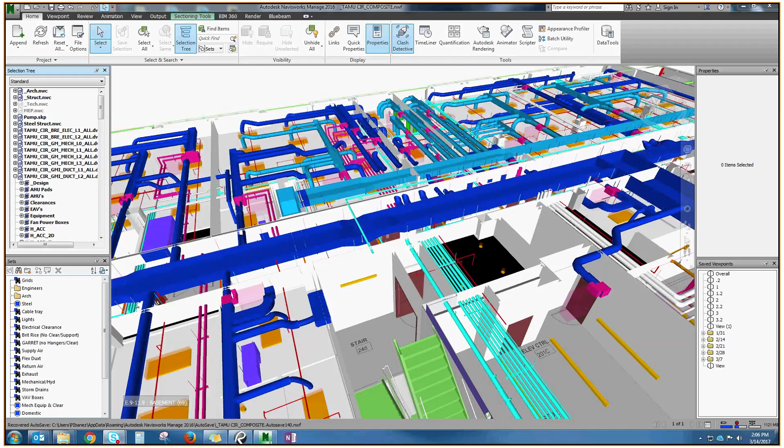Okay, cool. And I noticed, was it Justin? Did you send the email? I remember you sent an email, but was that the shop drawings for this floor? Yes, Pedro. Second floor shop drawings for ductwork, plumbing, and HVAC piping have all been submitted. Oh, okay, great. All right, has Brit Rice submitted shop drawings on this level yet? No, we haven't. All right, are you guys waiting on something or still coordinating something in-house? No, we're just working on them. Okay, those need to be turned ASAP.

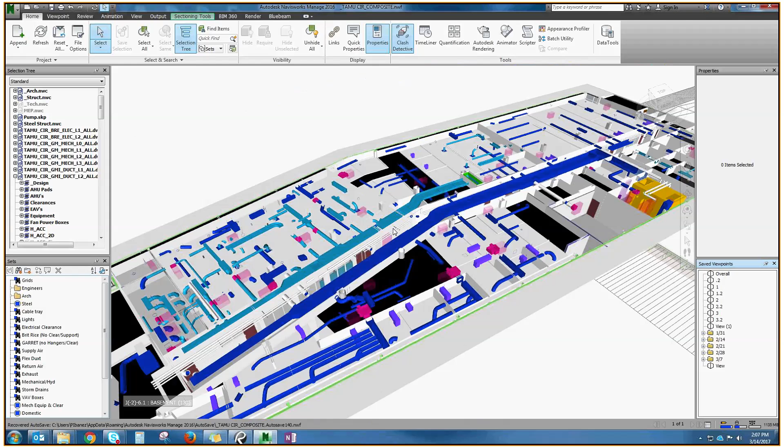Also on the third floor, going now to the third floor, we're less than 1 month from having these in the site, and we have basically nothing here, just one trade. I haven't checked these, but I guess you guys are coordinated between yourselves, plumbing and HVAC. Third floor, area D. Robbie. That's the HVAC mains, and yeah, they're self-coordinated. We're still putting in the plumbing. Okay.

What is the percentage for the HVAC here? Are you guys like 85, 90% modeled on the third floor? Probably closer to 95 to 100. Okay, cool. For the plumbing, for all the pipes? Well, you said HVAC. Hey, Pedro, yeah. I uploaded a third floor plumbing file. And to answer your question, I'm probably about 60% in. Okay. So all the plumbing pipes are about 60%? Yes. Okay. 60%.

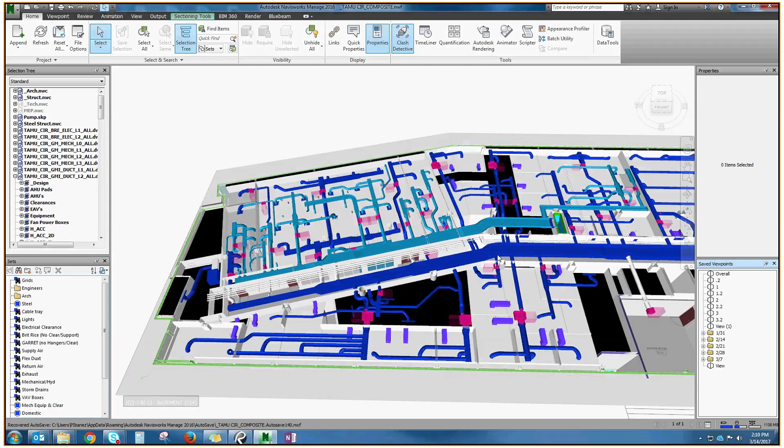I guess just the light fixtures and whatever major equipment, or if you have big conduits going on this level. But at least the light fixtures, try to have that, Sarah, by Thursday afternoon.

Fire protection, Jeff. When can you have something for third floor? We're probably about 40 to 50 right now. It wasn't at all complete, so I didn't upload for today, but I can get something for this week. Yeah, try to update your third floor with whatever you can put in there from here till Thursday, so you can also upload on Thursday afternoon. I work.

Okay. All right. Stuart, you there? Yep. And I see Bob as well. Hey Bob, did you end up logging in from another computer? Yeah, this is the portable CAD computer that's got the big screen.

Okay. That's all for me. We don't have any major conflicts with the trades. Hey, did you upload the third floor plumbing? There's a conflict with a storm and an I-beam we need to discuss. All right, hold on. That was Blake, is that correct, or did you get that figured out, Blake? I got it figured out, I think. I'd still like for y'all to take a look at it. Should be another one coming. It's on one page.

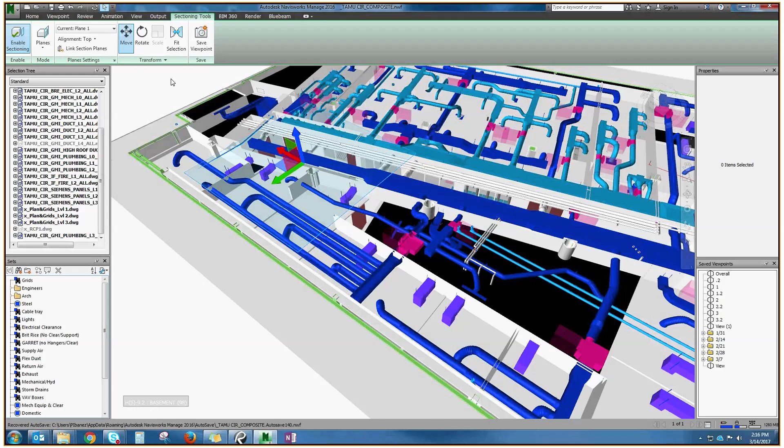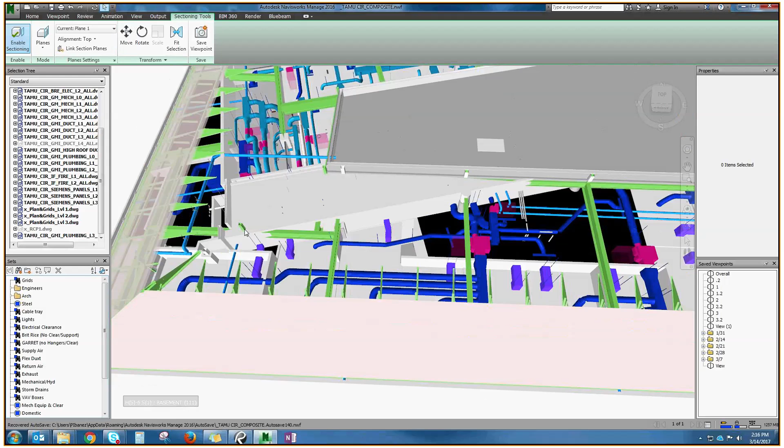Pull your section view up a little bit, Pedro. And it's out there on the 6-inch line that goes out there to the soffit. Pull the section down, you said? Up. More? Yes, a little bit more. All right, you can see it right over there now, so you're on your bottom left of your screen. This line? Yes.

What is the issue again? Sorry. I was having a conflict with structure, and I was able to make it work. I just wanted y'all to take a look at it and make sure that you're okay with how I ran that.

There, that 90 wasn't long enough to penetrate the soffit, so I did have to put a band and a short piece of pipe on there, so you will have a band in that soffit. Half in, half out? Pretty much all the way in it. Okay, is it hanging out below the soffit? You have to go back over there and look at it real quick. It might be a little bit. I just want to make sure Stuart and them are aware of what it is.

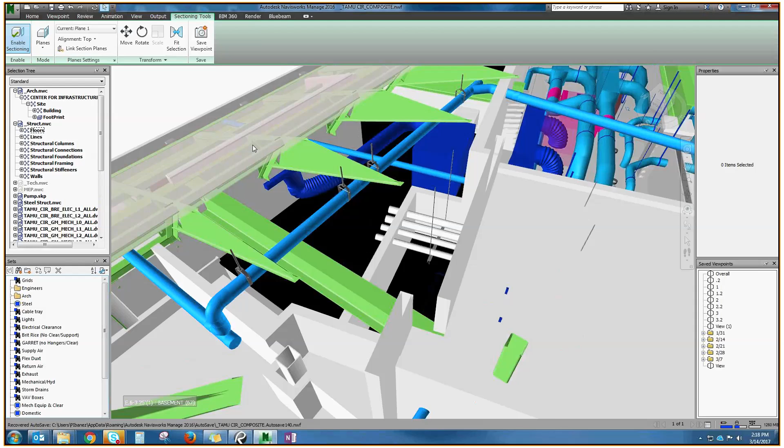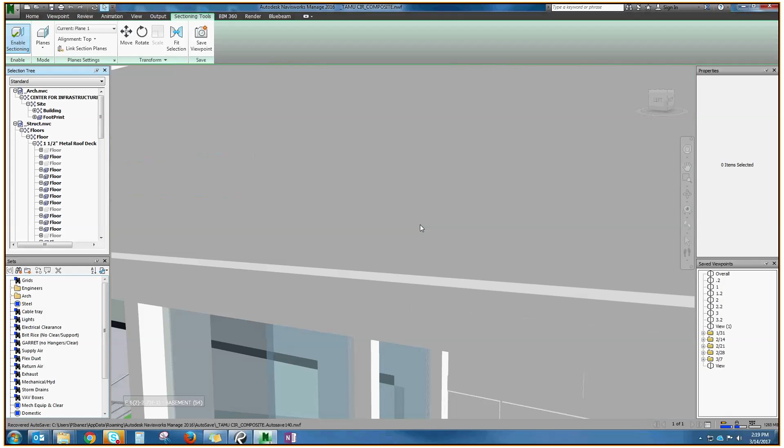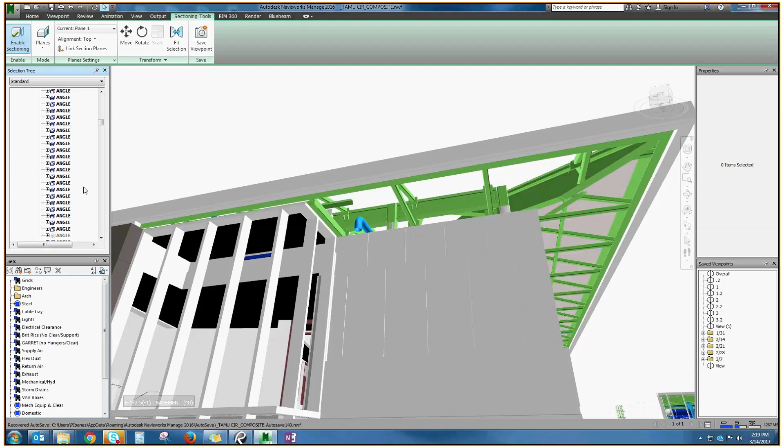Pedro, go back over there to the soffit where it turns down. Can we look at it from below so we can see what's sticking out? So is that what you're proposing we're going to see? Yes. Pedro, try to get eye level with that soffit. You know what a no-hub band looks like, Stuart? Yeah. It's going to be half in, half out, I believe, is what we want to make sure we're... Yeah, it's not great.

Well, the other thing to do is, I don't know if you can get through that beam. See the bead right in the middle of that blue below the soffit? That'd be the bottom of your band. We did not intend for anything to be sticking out from the bottom, so. What was y'all's plan? Because I think the plumbing drawing says it penetrates 4 inches and put a bird screen. It's 4 inches. I don't think they say anything about 4 inches below the soffit. Maybe them plumbing drawings.

On P103D, note 27 refers to turning down piping 4 inches below soffit with 6-inch open screen vent with 8-inch mesh cover. Okay. So we don't have to penetrate 4 inches. That's what I'm saying. What do you want to see there, Stuart? We'd like it to be flush with the bottom of the soffit. Well, that may be better. Then you ain't got a band. Does that work out, Blake? Flush?

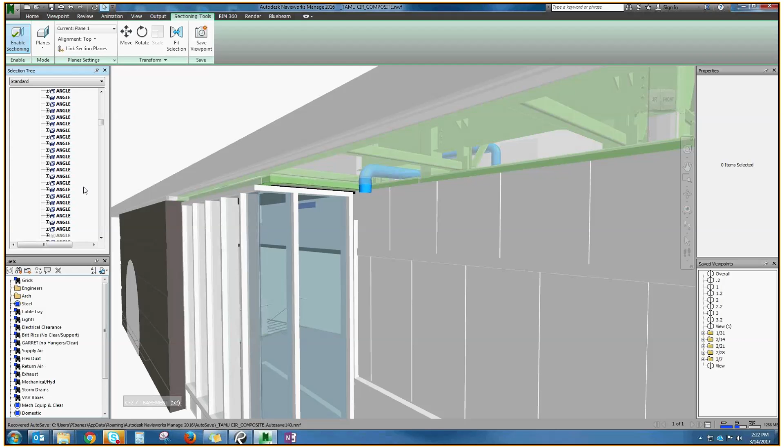You've got to get a caulk joint on that? Oh, yeah. They can seal to it. We'll just have to make sure we have that exact location for them to fabricate the panel around it. 1/4 inch down just to be able to get a caulk joint you're okay with? Yeah. In fact, what I'm thinking is it'll have to be in the middle of a panel instead of on a joint, so they can cut a hole. Yeah, probably 1/4 inch down so they can seal to it. Okay.

You said to center it in that soffit? Well, just leave it alone, Blake. Leave it like you got it. We'll have to field adjust to the center of a panel, left or right. Yeah, it won't have to be in the center. It just can't be on a joint. It just has to be in the field of a panel. You know what I mean? Are those 12 inches wide, or do you know? No, if you look on the reflected ceiling plan, the joints are laid out. They're larger panels. Does that make sense, Blake? Yeah.

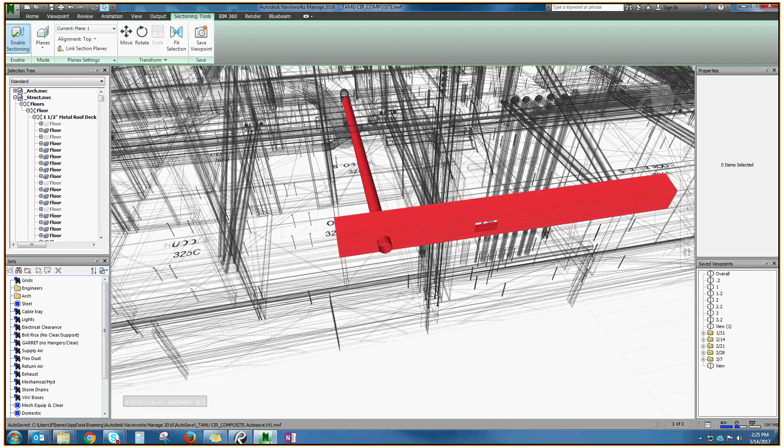Robbie, did we get the ERV relocated to the 6 inches where we got 2 foot clear now? Yes, we did. Y'all want to look at that, Stuart? Didn't know if y'all want to look at that or not, but that's 2 foot. He went to go grab a water. He'll be right back. Okay, so Kayla, we got that unit 2 foot as requested by the roofer, so that issue should go away now.

We also moved the ductwork for the structural openings, markups in the high bay, mid bay. Okay, so we're all good with those? Well, I mean, there was quite a bit of rework and move around, and there's some fabrication that's got to be redone. So, yeah, I'll take that up with Bartlett Cocke. But, yeah, it seems to be working out. It all fits. We had to move the unit. So your roof pad layout will not be correct. It'll have to be adjusted as well, Caitlin.

Yeah. Did you update that, Robbie? I updated in the model. I did not send them an updated model, updated CAD file.

All right. Now we can jump into this area. Caitlin, I don't know if Stuart's there yet, but you guys were gonna grab some other of your team members. Yeah, Brian, he's on his way. Okay.

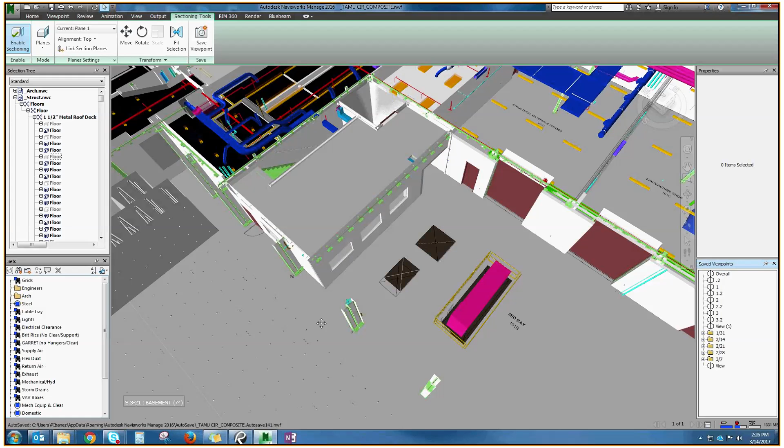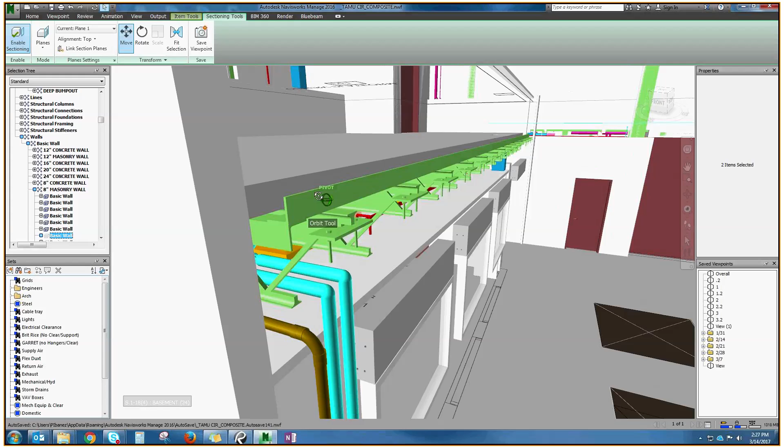Hey, what are we seeing, Pedro? Those green things sticking out through the wall of that office. Is that the steel ends of the joists? Yes, this is from the Steelers. So that's a conflict there. Probably not. Most likely not, since they still need to get better joists from whoever they are subbing the joists to. Well, it looks like the seats are outside of the wall. Mm-hmm.

See what I'm saying? If you make that wall solid again. Yeah, I know what you're saying. You know, maybe they just have them. I think another problem is there's a couple of structural models. We're not sure which one's the correct one or what's going to be actual, or if it's going to be what's coming to the job site, or what the architect or structural engineer put in the model.

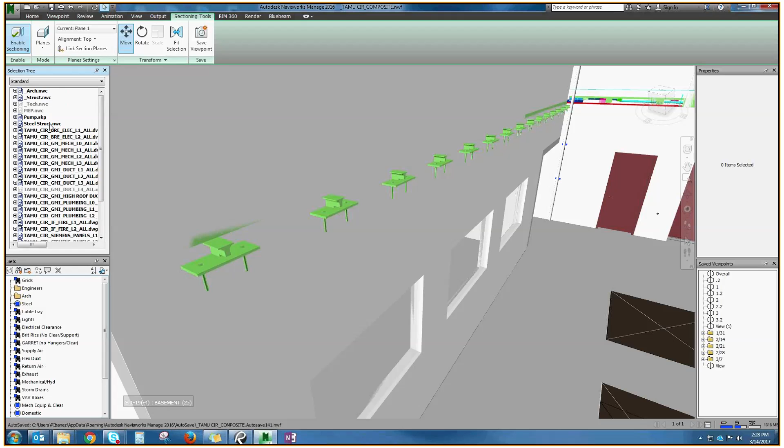Yeah, I just painted green everything from the steel guys. Yeah, the green, that looks like the fabricators because it's got all of the hard stuff. Details, yes. So that should be what they're proposing to send out, right? Yes. Which in that case would be outside of the wall. But this thing sticking out of the wall is from the joist, and the Steeler guys are subbing the joist out to someone else. Okay, but do they know about that conflict there?

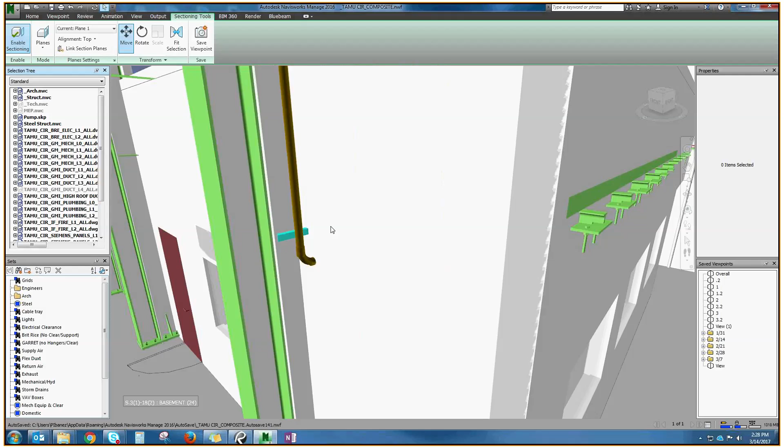Well, to be honest with you, I don't think this is a conflict on their head, because they just, I guess, generically put a joist in there. So once we bring the joist model in here from the joist guys, this is gonna go away. That's what I believe. Okay, but yes, I'll ask the question. I got a question. So their joists are showing up and being installed on Friday. So what's the holdup of getting the corrected joist in the model?

Good question. This is a problem that we're trying to coordinate, and they're installing it, and then we're going to coordinate it. That's kind of backwards. We need to get the model updated with the corrected. It's going to start getting expensive when somebody's got to start paying for moves because the steel ain't right. And as far as I know, we've already reviewed the joist shop drawings, so.

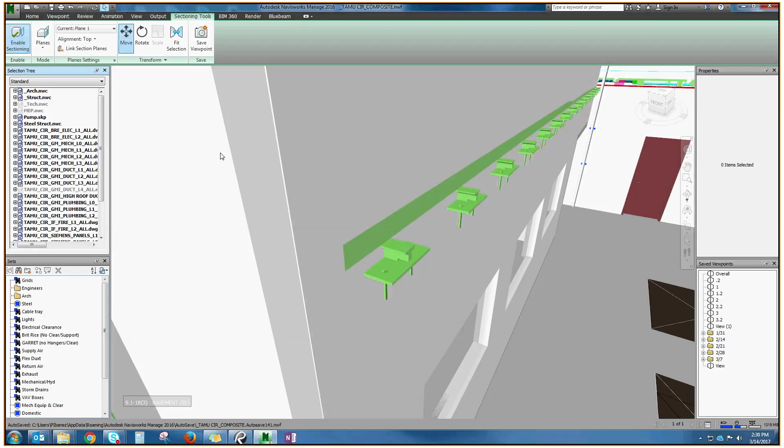I'll call the steel guys after the meeting. Probably they just forgot to tell me. I was waiting on them for the joist model. Yes, they just forgot then. I'll call them again today.

All right. So which area or which part do you guys want to take a look at? Yeah, Pedro, did you get my email I sent a few minutes before the meeting? That storage area and that in area C, we need to make sure we're clear in some areas. Hey, Bear, I got a question about the louvers.

On the architectural markups on those two louvers, they tell us how high one can be and how wide another one can be. It says, is the engineer going to tell us what the other dimension is on those louvers? It should be on that markup. It's not. No, sir. It just says one side. It can't be any higher than 30. Well, for the big one, it says no higher than 36.

No, Robbie, they're not. I got Kevin. He should be recalculating the free area required based on the height modification. So Kevin will be able to come back and tell us. He should be working on that. We can follow up with him to make sure. I called him earlier but he didn't answer. I sent him an email. Okay. The drawings indicate a free area. They give us one side. Kevin can figure out the other side, and that'll be on the resubmittal he's supposed to be working on.

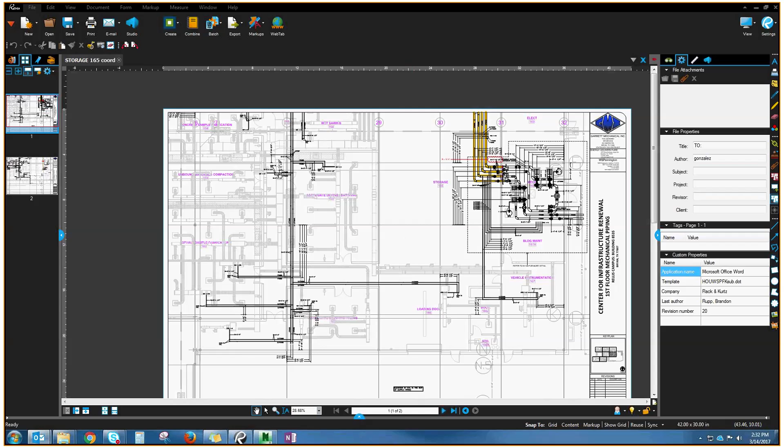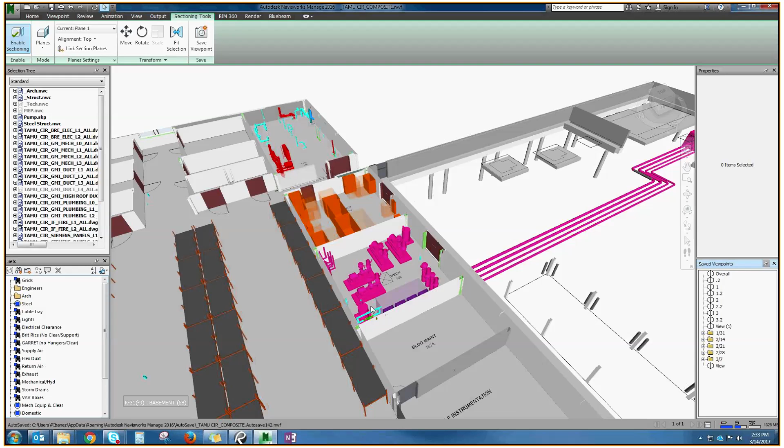So you see that area we need to look at? Highlighter. That's just to kind of orient you. Can we go look at it in the model? Okay, Pedro, if you can raise the cut plane up to just hit the bottom of the joists so we can see the area that we have to work with. You can lower it a little bit. Oh, okay.

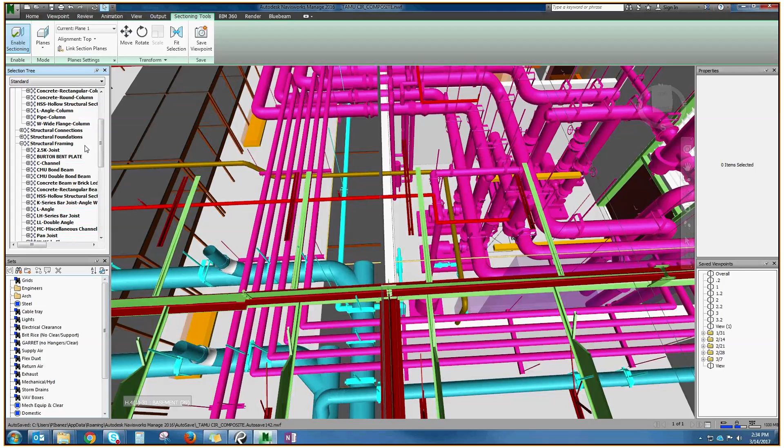So we have those racks in there now. You can see they're 8-foot tall racks, and they want to be able to put a pallet with stuff on the pallet, like buckets full of rocks, on top of those racks as well. So those walls in the area are CMU up to 12'4", and then above 12'4" to deck, they're a gypboard partition. So right now, the mechanical piping that's going through the wall and then turning and going north, at the level they're at now, it looks like they're clipping the top of that CMU. So they're half in the CMU and half in the gypboard.

I would imagine it would be preferable to get them all in the gyp, so it's easier to create a penetration. And we need to move those up as high as we can so that we have as much clearance above those racks as possible. So if we move north a little bit, see where they're turning up and heading west.

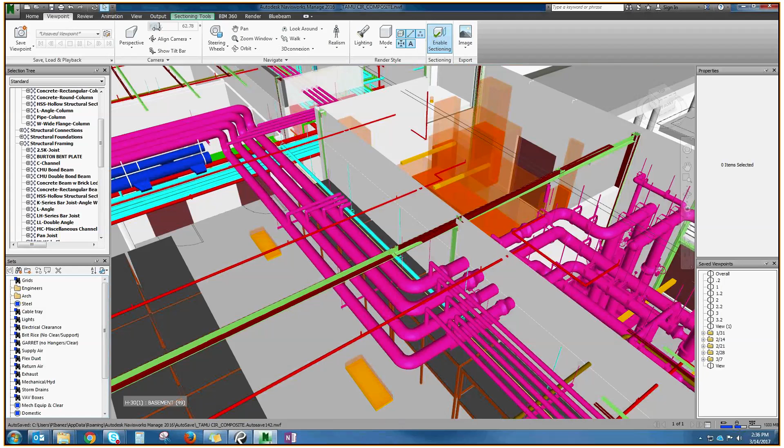Hello. Hey, Bear. Yeah. Is it possible for those lines to not turn down, go through the wall at the height that they end up with? We'll let Bear answer that when he gets off the phone. It's a very convenient time for a phone call. I'm sorry. Hey, Bear. I hope that was important.

Yeah, it's important. All that pipe is fabricated and ready to be hung as soon as we get an RFI. So if you want to raise that, we've signed off on that first floor. All that steel pipe is fabricated and welded up. So to start making moves on that piping right now is substantial cost. We'll do it however you want to do it. I'm just telling you now that it's all fabricated and there's going to be substantial costs associated with moving it at this point. Okay. Well, there was a note on the mechanical drawings for that piping to be up tight against structure. So I guess that got missed or the question wasn't asked.

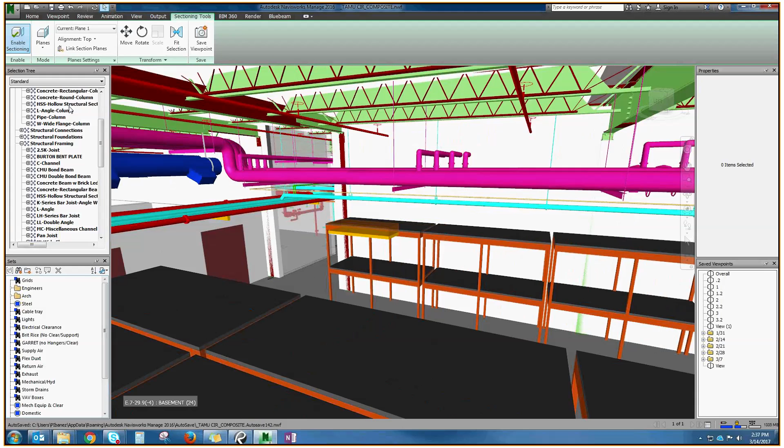So right now, when it goes through that wall, those pipes will be half in CMU and half in a gypboard partition. See that line that runs through those pipes? That's where it transitions from CMU to gypboard. I don't know how that's going to work cleanly.

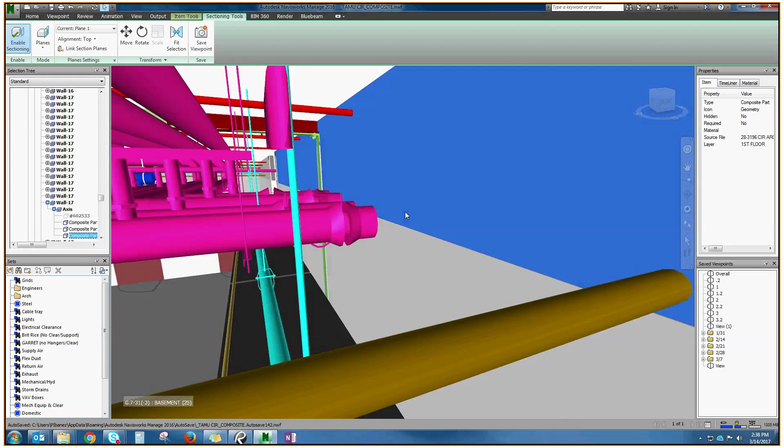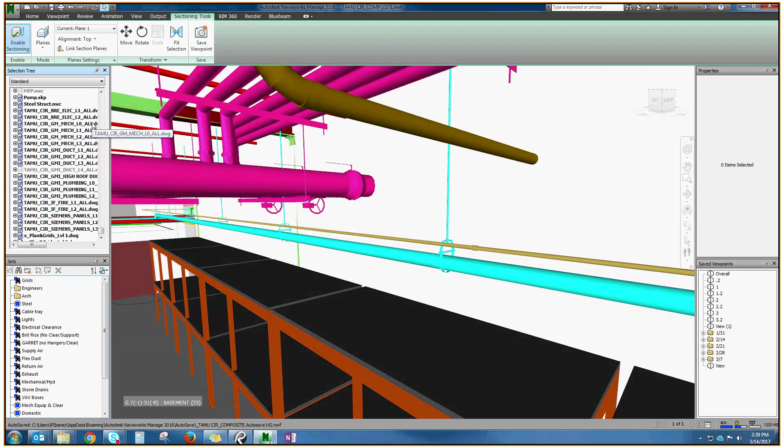Okay. And frankly, they could be higher, but those aren't the worst thing because you could fit stuff underneath those on top of those racks. So that plumbing line, and it looks like there's another line next to that. What is that below that? The blue plumbing line and the yellow line below that. Those two lines just need to go up above 12'4". There's a 16-foot ceiling in there, or not a ceiling, but 16, 17 feet to the deck. So we should be able to figure out a way to do that.

So is that a... Those are basically just poking out to go around the electrical room. The 2-inch water line and a 1/2-inch gas line coming off the mains. Yeah. Those shouldn't be a problem to move up. Yeah. Get those out of the way. And then it looks like there are some fire lines on the other side.

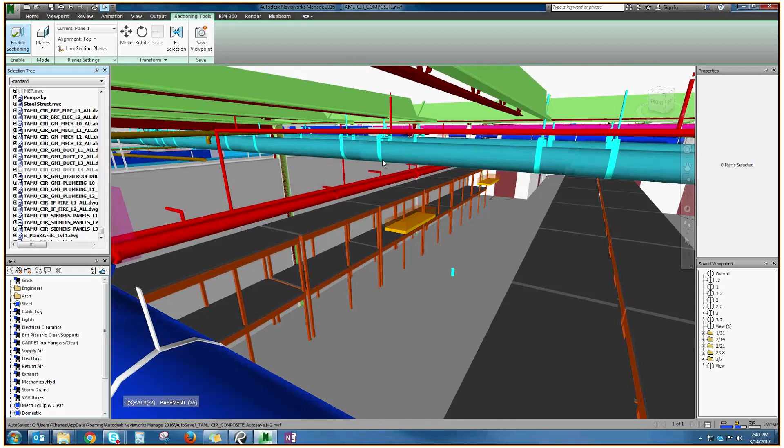On the west wall of that storage area, Pedro? Yeah, so you can imagine trying to put something on the top shelf of those racks. It's going to be difficult with those fire lines there. So we need to get those up as high as we can, preferably above 12'4". That's gonna be a huge problem with all the ductwork to the west of that.

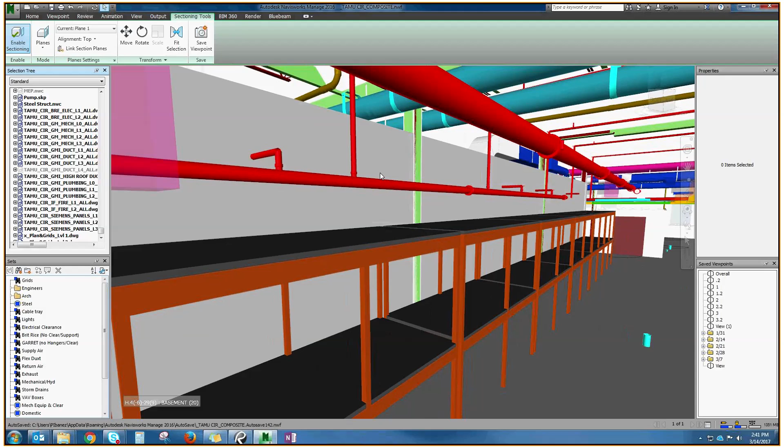Well, it only needs to go up. We see where those orange racks are. That's the critical area. Yeah. So there's that wall, there's a corridor on the north of those racks and on the south of those racks. Once you hit the corridor, you're okay. You just need to be above, that space above the racks just needs to be clear.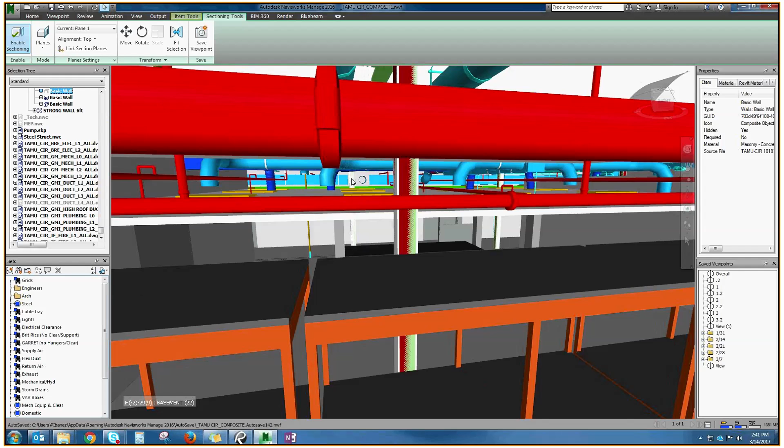Yeah, just going up there puts everything through those rooms to the west underneath that duct. Means trapped and everything else. It's a lot of recoordination. Well, can one of those lines be on the other side? Can that smaller one move to the other side of that wall? Is that? I mean, I'm not sure what's going on there.

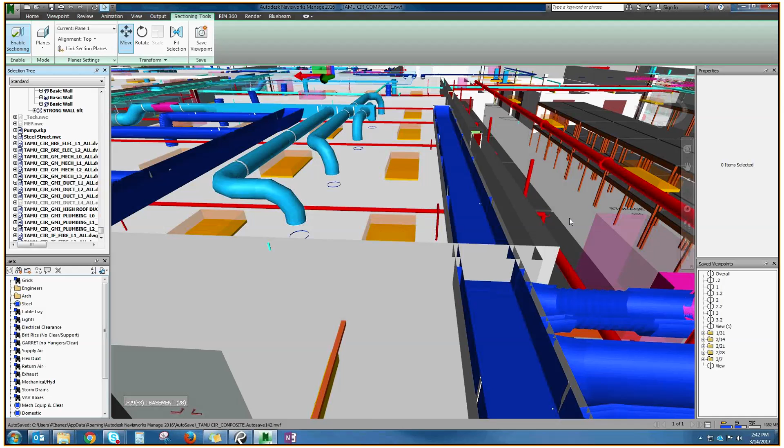So you're going up. Yeah, let's take a look. Yeah, because you're going through that wall, looks like 4 or 5 times or 3 times, and that's a nice CMU partition you wouldn't have to go through if you're on the other side. Yeah, that might be a possibility. I mean, we'll have to go through it because I got to get back out that direction. So I don't know if that'll be CMU and GYP like the other side is, or.

It's CMU up to 12'4", and then above 12'4", it's GYP. Okay. For exactly this reason. And I would be going through the GYP, so that might be a possibility going to that other side then. Okay. And what about that larger? That looks like a main. Yeah, that's your standpipe.

Could that move to this center? There's the racks that are back to back in the middle of the room. If that standpipe went down the center of those 2 racks between them, it wouldn't have to move up. It could stay at that same level, and they could put stuff on either side of it. That could probably be fine as well. Or if it could move up at all,

it'd be better too. Yeah, as I said, I don't know that we got a whole lot of room up because I want to say there's a couple duct lines there. And there's some beams. That was the determining factor, going above it, and I was running into beams, so trying to go up and down. I think elevation-wise, I'm pretty darn close, but shifting east or west should be a possibility.

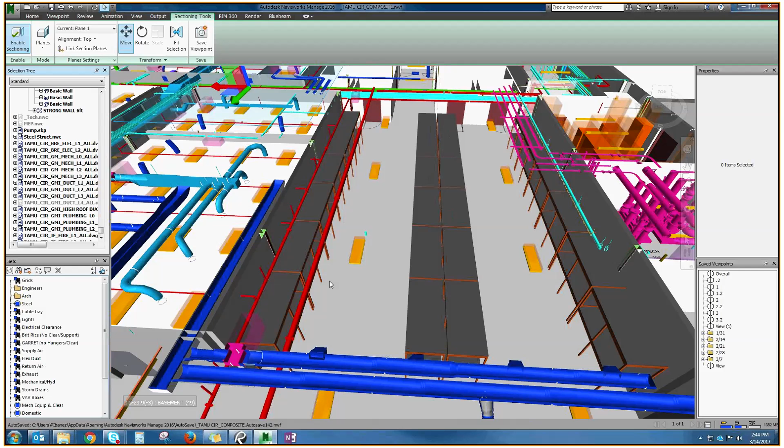So you're centered over those racks. Should be the center between the east and west walls of that room. Yeah, I'll just have to grab a dimension on it, and that should be feasible. Okay. Hey, Justin or Blake, you guys said this is not a big deal moving these 2 lines, the gas and the water line? No, that's copper, and those can be adjusted up. We'll make that happen.

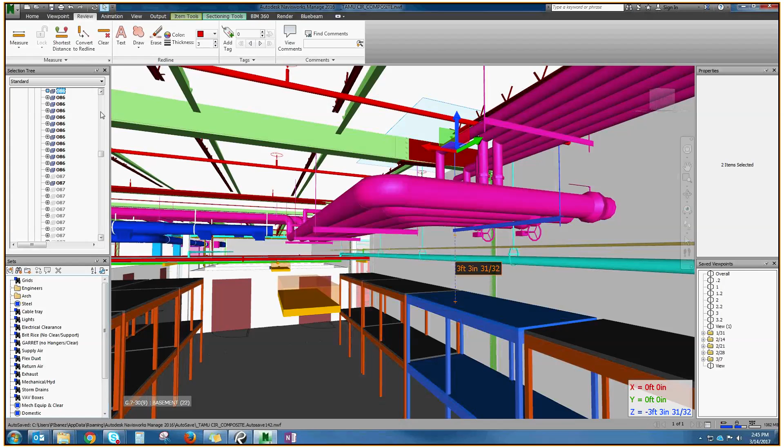Do they need more than 3 feet here, Stuart? Yeah, so what they're doing in there is they've got what they call a walkie stacker, kind of like a hand truck that lifts up a pallet, put the pallet on top of that rack, and then it's not necessarily the height of what they're putting on the rack, it's the height of the machine that lifts it up. Yeah.

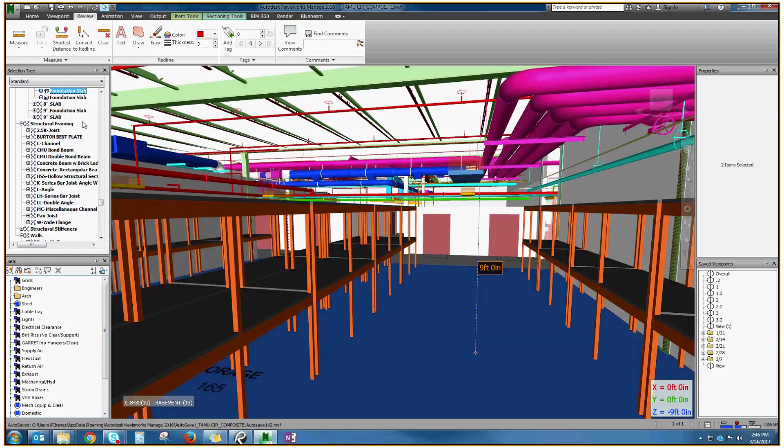All the way up. So, and the other thing, we need to show those lights up at 12'4". That's where we show them in our sections.

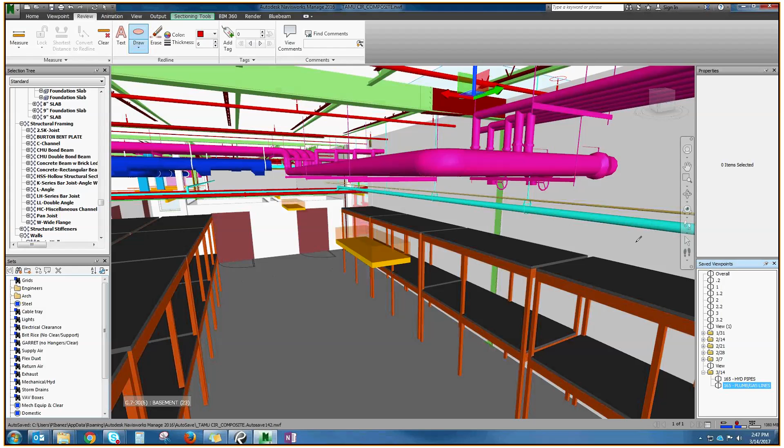And I think if we don't move these lines, I think the end users are going to go out there and look at that and say, well, why didn't they just run those things straight across? Why do they turn it down there and get in our way? Well, you are tight. When you go on the other side of that wall in the mechanical room, you got air separators and everything else that stick up higher than those mains. Yeah. So let's look at those conflicts in there.

You got lines that come off the top as well. It's got to be coming off the top. Those lines are tight to the structure. Your air separators stick above them pipes so high on your returns. All right. So how much space above that do we have?

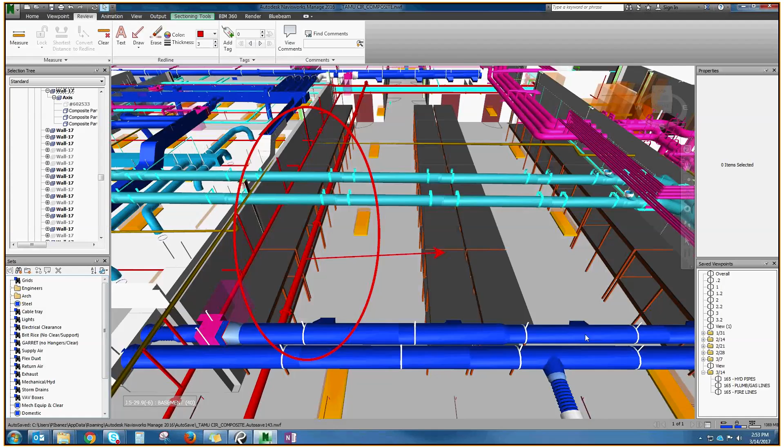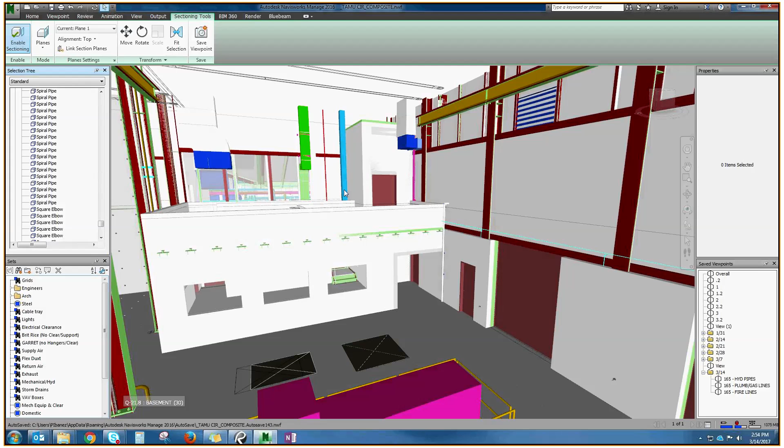All right, so you guys want to talk about the Mid Bay area, the louver thing that was going on yesterday? We've got Brian here now, so he can help. Well, which elements are we taking a look at? This louver here, I believe this duct, the 90, the louver, and this one. Okay. All right, I just found out about these yesterday. I don't know who wants to say something about this, or what is the conflict here?

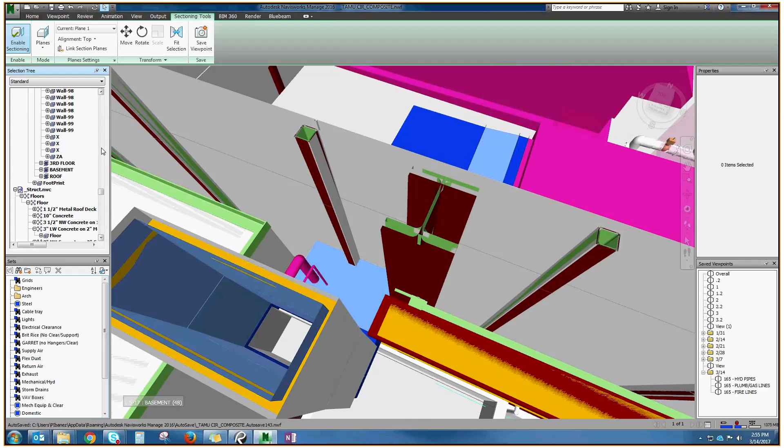Looks like you guys got those fixed based on markups, right? And then on the left, so those are okay. Except for that. What's that pipe going through there? That goes to that fan coil unit on top of that stairwell. We'll just have to figure a way to reroute it. Route it, yeah. Okay. Told y'all yesterday we was going to reroute refrigeration if we made the move. That's what we was referring to. Okay. Looked like it was going through the elevator. That unit sits inside the elevator shaft at the top of the shaft, right up above the elevators.

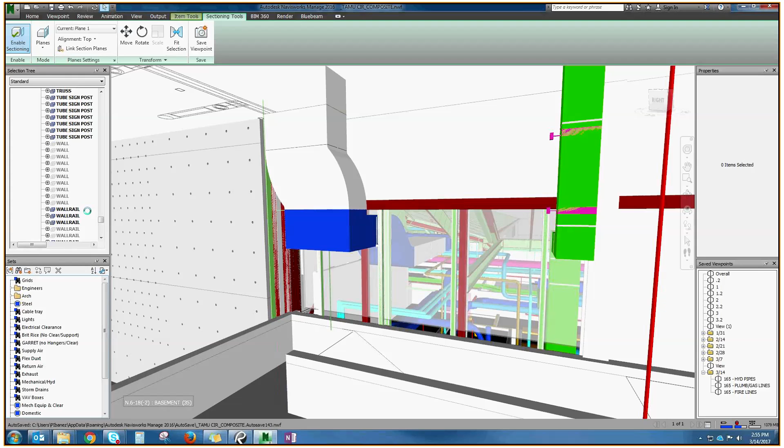All right, looks good. That's just the refrigerant line that goes up to a condenser outside. The unit is inside the elevator shaft itself. It's a wall hung split system unit that'll be at the top of the elevator shaft. It's just conditioning the shaft. Yes. And so that line is heading out to a compressor outside, sitting on the roof. Yes, that's correct. It's up on the roof, outside the wall next to the shaft. So could that line just go through the wall and then out to that? Yeah, but it's got to go up and out. Yeah, we'll fix it. Okay.

This one, see, there's that tube running vertically, that duct's running through that steel tube there, red. Yeah. That's where that conflict, we wanted to get above the beam above it. You didn't say move it up. They said move it over to 2'11" and keep the elevation the same on that drawing. So when we move it over to 2'11" off of S, that's where it is right there. Wait a minute. So this is corrected. Yes, sir, that's the location that matches the markups on your comments. Is that where you want it, or you want it somewhere else?

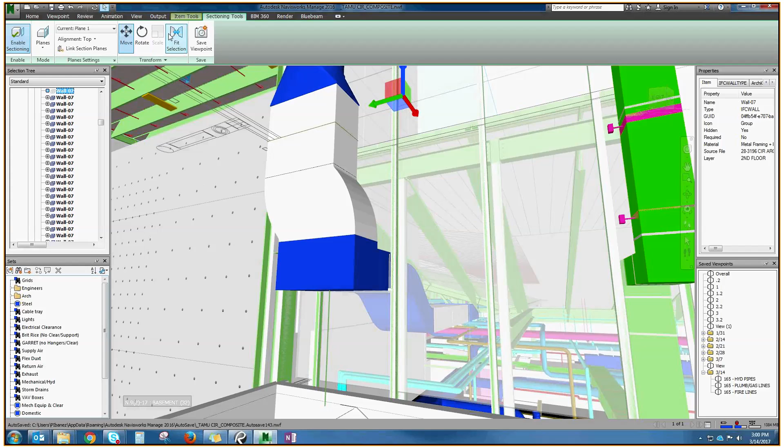Where is this 8x8 beam at? Right now, it's right above that duct. At the very top up there? No, it should. Why is it not showing up on the steel? Question.

That's kind of the whole purpose. I mean, that's why we're kind of getting aggravated. We're coordinating with something and nobody knows what's there. Correct. Nobody knows what's supposed to be there, and the structural guys ain't got it corrected. That's why it gets aggravating, Stuart. I understand. So that beam right there is y'all's structural steel, not theirs, correct? That is or is not going to be there, or we don't know.

Well, it's there. I'm not sure why it's not in the fabricator's model. There's an 8x8 tube there. Otherwise, this building's not going to stand up. If we go up above that, I'm worried we're not going to have room between that and the roof. I hadn't looked at it real close, but just with that turn and everything. Yeah.

Hey, Pedro, is it possible to just see the fabricator's model? Yes. And only that, nothing else, just their model. Oh. Just their model, or do you mean hiding even mechanical? Yeah, I want to see only the steel fab model. How high is that 90 now? What elevation is that at? Josh, can you call 101, please? Josh, can you call 101?

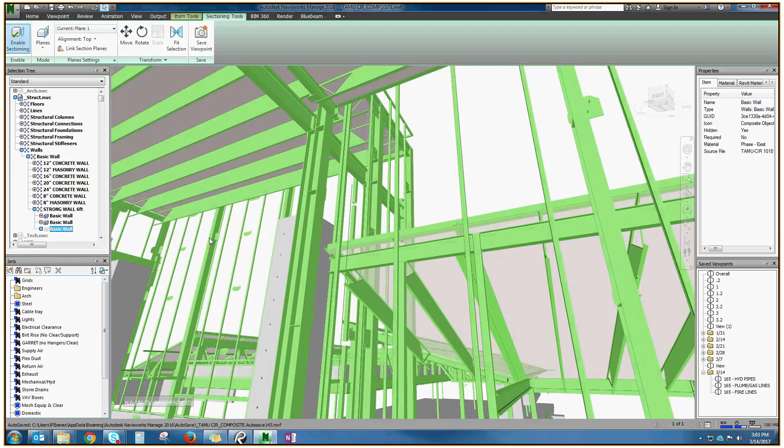Hey, I'm looking in the model, Stuart, and I think if there is that 8-inch tube right there, we'll just use that maroon one for now to go over the top. I think there's room to go over the top and be under the roof on the other side. Okay, if we can do that, that would be preferable. What I'm worried about is that column beyond. The fabricators moved it. Yeah, because y'all's has an I-beam right through the duct, and theirs has got it moved over.

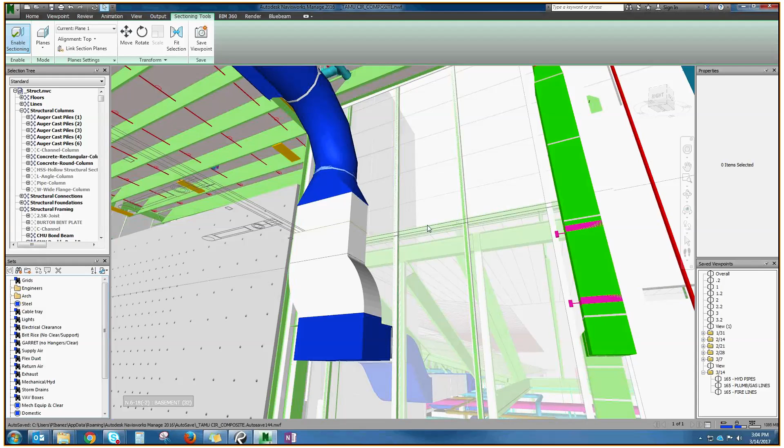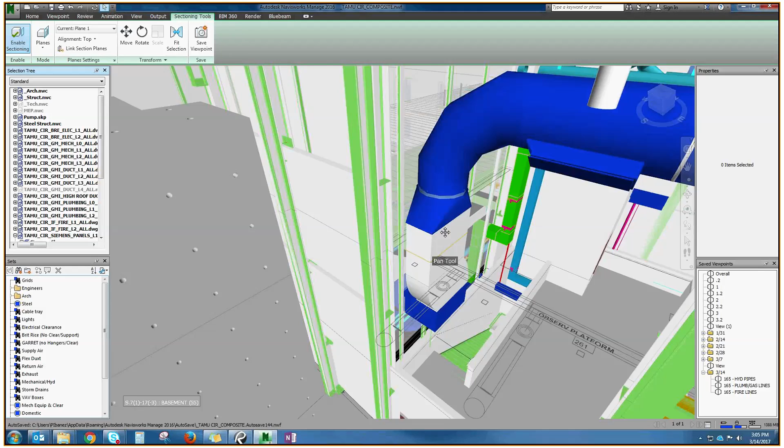Pedro, what's the date of the structural model that you have in there? This comes from November. 11/2, November 2nd. That's when I put it in here, so it's probably before this date. Okay, we have one from January that's more current, but I'll email Gessner and tell them to send us the current Revit file. Okay. We'll have the latest with all the ASIs. All right.

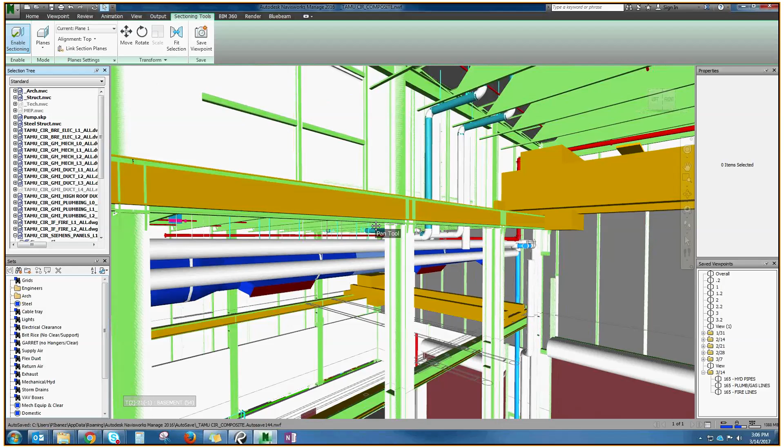Is there another area you guys want to take a look at? If that's it, then we're going to look at the basement. Stuart, you said you want to take a look at the basement? Yeah, I thought that was on the agenda for hydraulic piping. Is that supposed to be? Yeah, I thought Roger had brought up wanting to look at where those penetrations were missed. Yeah, that is correct. Roger wanted to get a snapshot view from the mud slab looking up.

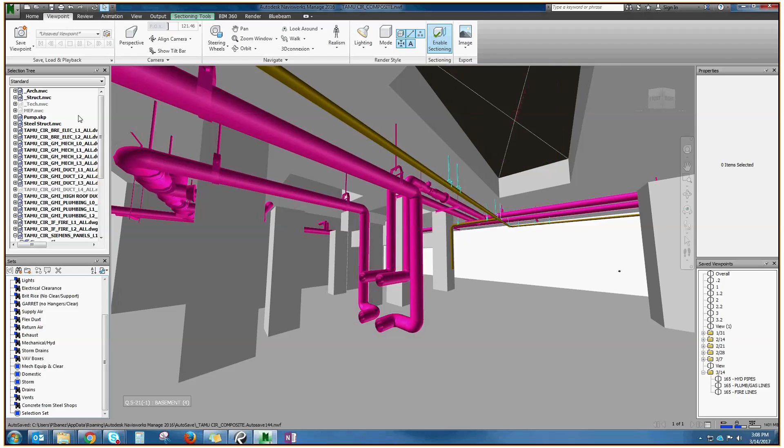So the area we need to be is beyond that wall we're looking at. It's actually not in the basement, it's in the crawl space. Go ahead. Yeah, I'd like to be basically at the mud slab elevation, looking up at where those blockouts were supposed to be and whatever piping is supposed to be going to them.

I'm not sure how well y'all are in terms of getting finished with GS Hydro, if you're showing the piping at all, or if you're showing anything or nothing, or how much we should expect it to move, so that we can attempt to coordinate as much as possible as soon as possible. Keep in mind too, we don't have all the ASI 45 updates drawn in as well on our side.

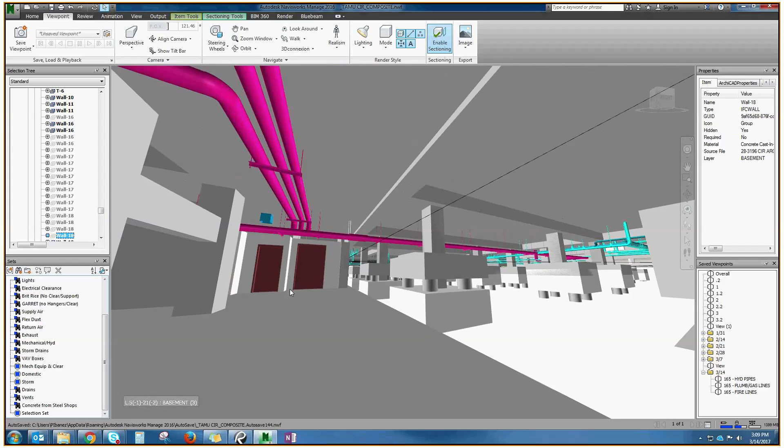Hey, you there, Roger? Yeah, we're here, Pedro. All right. So which area exactly is it that you guys want to take a look at? Do you remember where Bob showed you those two blockouts in the floor in that model? Was it 165? Yeah, 165. C and D, or it's just north of the mid bay.

Okay. So therefore, we cannot see it from here. I guess it's just visible. Those two ones. Yeah. I want to basically look up at those from the mud slab below just to see. They don't go all the way down. Go down? Okay. No, it just stops there. It's just that flat rectangle. Can we give them some? I was just curious how much crap was underneath the pan slab there.

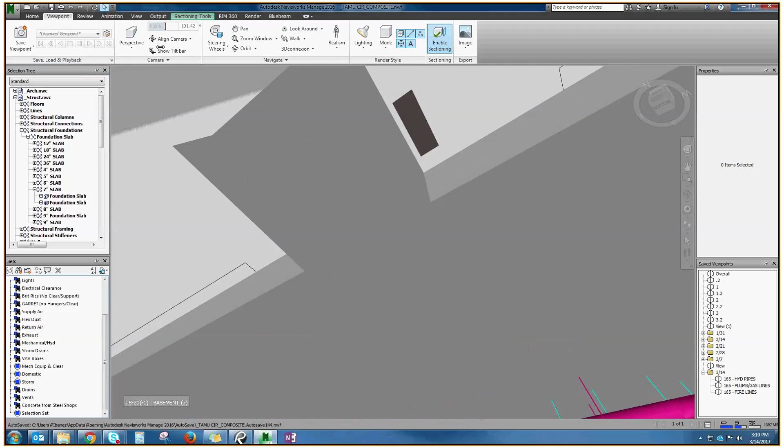But let me see if I can. Okay, because I can just make them transparent. Yeah, transparent that floor and see if we can see them. Hold on. Yeah, I do. That's one. There's nothing right below them. Okay. But basically what's going to happen is they're going to go down in 90 and then go through the wall into the mid bay.

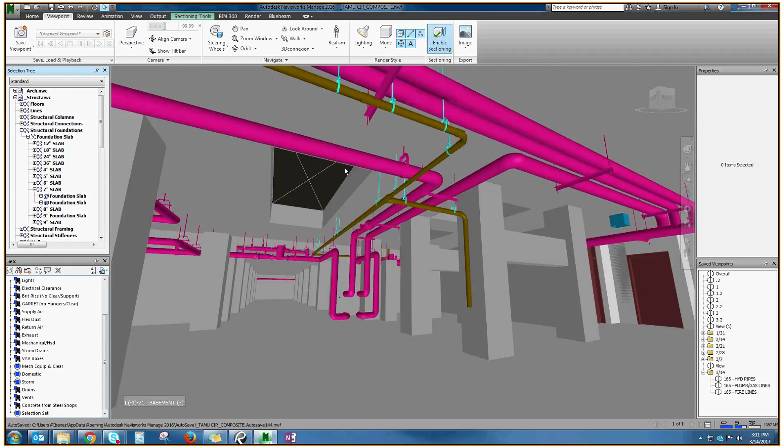And so we need to figure out where they're going to run, and if other stuff is, we want to get them up tight to the slab, and I don't know if everything else is already in the way or not. Let's type it in. Oh wait, let me hit cancel. Okay. Anything else?

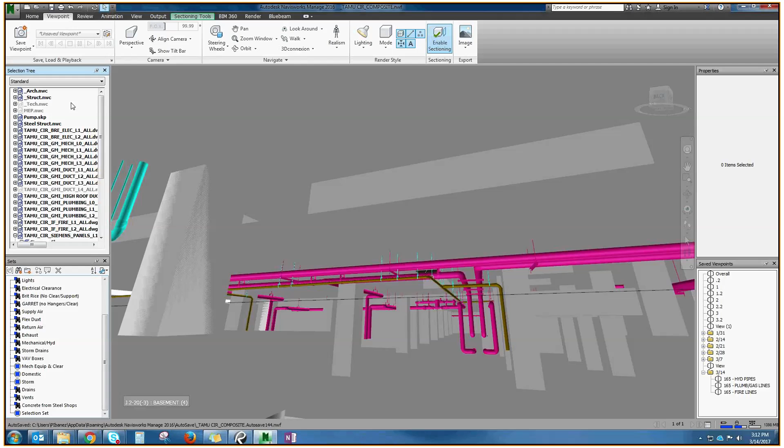Yeah, can you make it to where we can look through the floor? What was that again? I thought you said you can transparent the floor so we can kind of see through it. I already did. Okay. There's nothing. You don't have anything below. Okay. Mm-hmm. Alrighty. Well, that'll do it for now. Okay, okay.

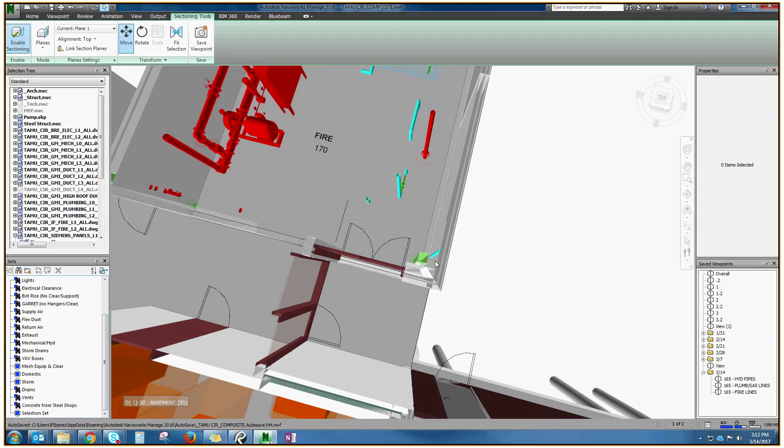All right, Bear, Britt Rice, Garret, Jeff. Any areas you need to take a look at? Yeah, this is Jeff. I wanted to just quick look over where we got our fire pump and all the equipment on that northeast corner. On your room? Yeah, right there. Just north of that door. I got that sleeve going through, and looking at some of the other models, it looked like that was going to be in a pad for some of the equipment for Garret, so I was just curious about that. I don't know if that changed or what.

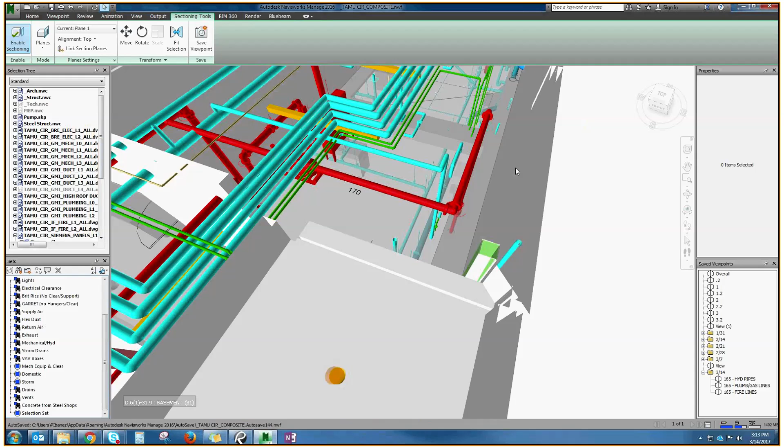Which sleeve are you referencing? That one kind of to the right side of the screen over there, going through the slab. Along that east wall. Right there? Yes, sir. That's where we go out to go for the remote FDC connection. That's the RO skid. Barry, I was going to get with you on that. Do you want to put a sleeve in that pad, or do you want to move that pad to the north? Well, I don't see the pad right now.

Is that boxed in or shown or something? Or you got the first floor turned off or something? Pedro? Barry, I think that layer was turned off when I was doing that. Well, right there, you're at the end of the pad, so it should clear, right? And the water softener now goes away. We'll clean that up.

Did you draw that in? One of the last drawings I had, I was going like right through it, so I just wanted to double check. Justin and/or Blake, did we go back and verify that with the approved RO submittal? Make sure we're still good on that size. On the size for what? For that RO skid and pad? I have not, no. I'll double check that.

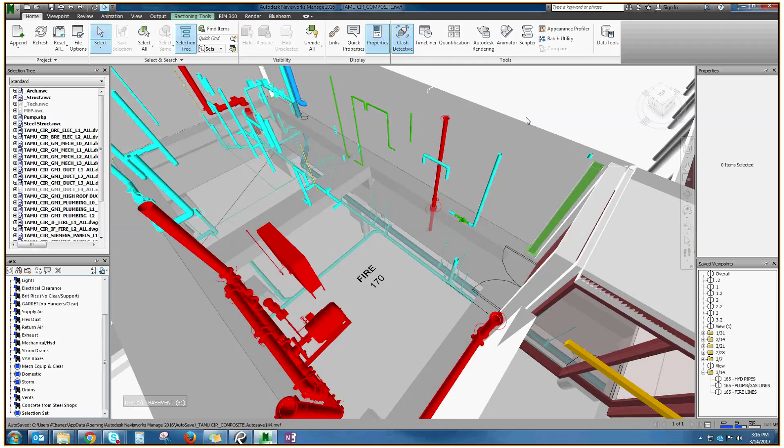Bob, what is the name of the guy, the one that gave us the steel model? Do you remember? It's with Eagle. I just cannot find his contact information. You're asking me? Yeah. You don't know who that is? They gave you the steel backgrounds? Yeah. I'll have to go to my laptop. I'm in the main room here. I found him. You got him? Yeah. We haven't really gotten any back since you told me that. Let me try to give him a call while we're here still.

Who's still in there? Sarah? Isn't she electrical? What'd you ask?

Good afternoon. Thanks for calling Eagle Energy Steel. Hi, miss. Can I please speak to Cameron? Who's speaking? This is Pedro with Bartlett Cook General Contractors. He is in a meeting. Can I let him know that you called? I'll send him an email. What is your phone number? 210-410-7244. That's 210-410-7244. Correct. Okay, so that's Pedro, correct? Yes. Okay, I'll let him know. Thank you.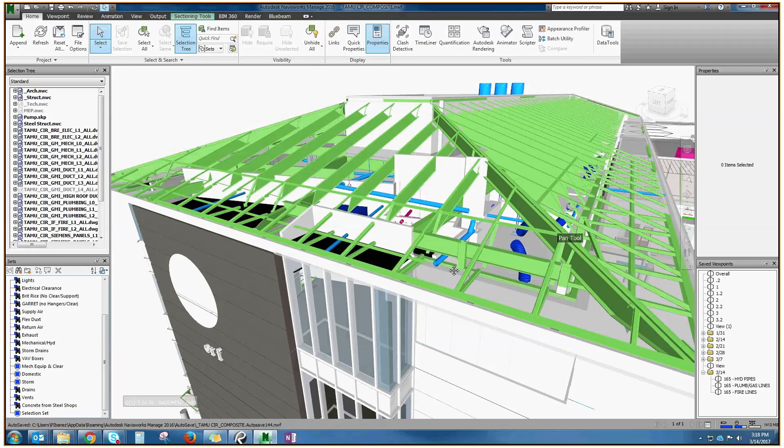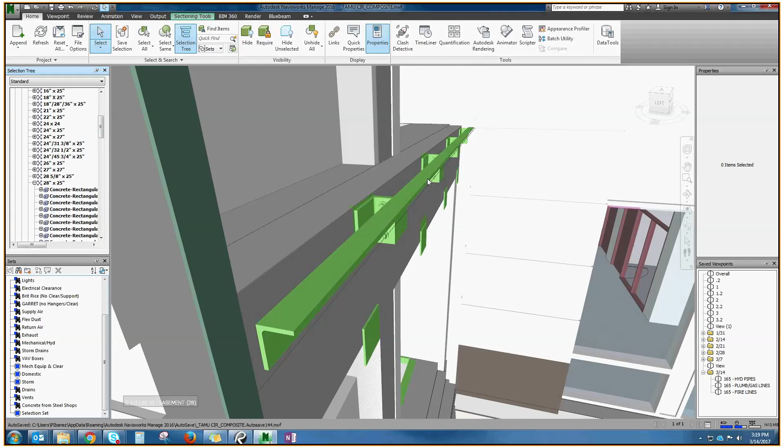Never mind, guys. Just wanted to get this guy here in the model to get a pointer from him on what the hell's going on with his model. Hey, Bob, can you send me just a quick note of which areas the steel joists have been placed? In the field? Yeah, because I'm seeing that all over, like what Stuart pointed out. That's a relief angle, for some reason the wall is missing there. Okay, never mind that. I hit the wall, I guess, when I was taking a look at these lines in there. Yeah, but if you can just do that, Bob.

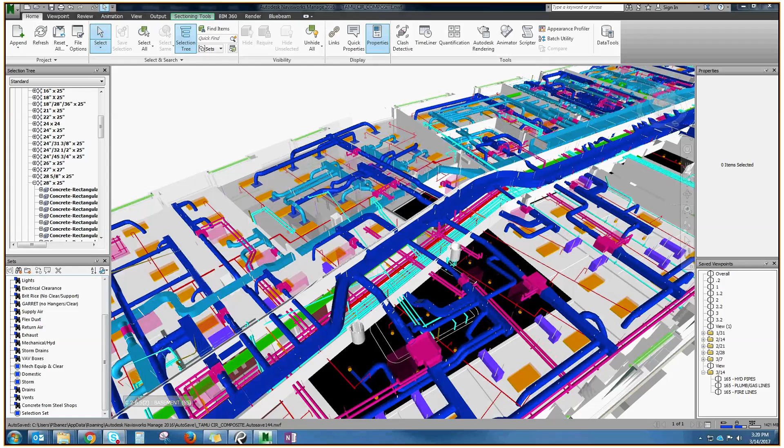Here, Bob. Yeah, I'm here. Can you just tell me which areas the steel has been placed? All right. Okay, thank you, Stuart. As soon as I get a word from this guy, I'll create a quick meeting and let you know, to take a look at the screen together with this guy. Okay, yeah. Well, we were able to get Navisworks running here on our Revit machine. So I was looking for the steel file on Box and I couldn't find it.

It should be in your Navisworks file. Yeah, it's in there, but if you just want the IFC, I got an IFC from these guys. Let me see if I can just sort by from. Is it in Box? I have no idea if it's in there. Let me check. I bet it's the archived. No, it's not in there. No, I mean from the fabricator, from the steel firm. I'm pretty sure he sent it to me. Can you save it into the Box? Yes, correct. I'll do that. I'll find it.

That'll just help us to try and find any conflicts, because it's hard for me when you're driving. You know what I mean? I can't see everything because you're driving. It's going too fast. Yeah, I'm a terrible backseat driver. Yeah, I found it. I'm uploading it now. Okay.